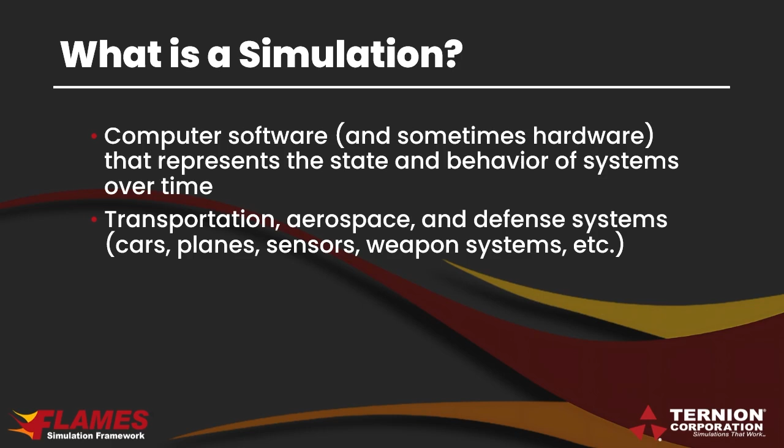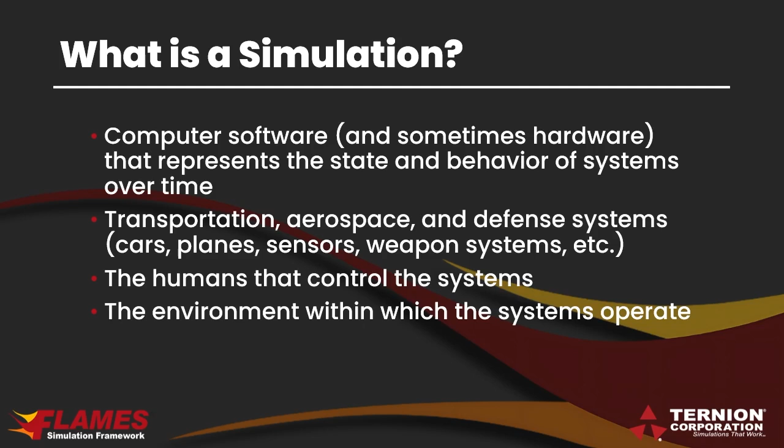The systems that we're talking about are aerospace and defense systems such as cars, planes, sensors, etc. We're also sometimes simulating the humans that control those systems, and we're simulating the environment within which the systems operate, such as the terrain, the bodies of water, or maybe the weather, the roads, things like that.

Oftentimes, simulations are divided into three different categories. The first category is live. It's real humans operating real equipment for purposes other than the reason for which that equipment was created. For example, if you're training how to use a piece of equipment or you're testing that equipment, that would be considered live simulation. Virtual simulation is what people oftentimes think about when they hear the word simulation.

This is when you develop software and hardware to represent real equipment as closely as possible so that real humans can use it like they're using the real equipment. So this might be a flight simulator where you're in a simulated cockpit and you're training on how to fly an airplane. That would be considered a virtual simulation.

The third category is a constructive simulation. In a constructive simulation, it's 100% software. It's a computer program that is simulating equipment as well as humans.

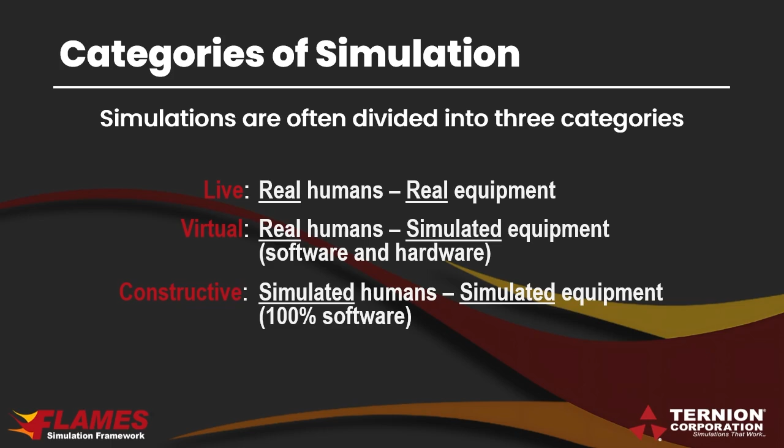In development of simulation and the maintenance of simulation, there are some really big challenges. Two of those are, first of all, that most organizations have unique requirements, and those requirements change often. This means that we will always have to have many different simulations, and we'll have to maintain those simulations. The next challenge is that simulations are oftentimes very large and very complex systems, and what this means is that it's very expensive and time-consuming to develop those simulations and to maintain them.

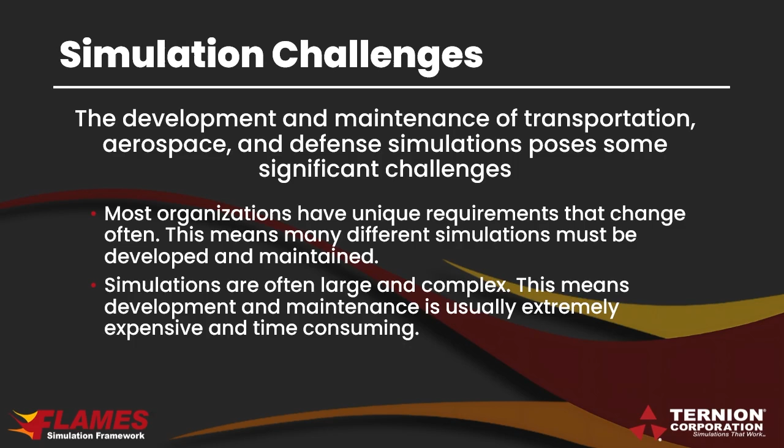And these two challenges together ultimately lead to the fact that a lot of organizations don't have the simulations that they need. One of the reasons that simulations are so expensive and time-consuming to develop is that in the past, simulations have been developed uniquely for each set of requirements.

So an organization has requirements, they put out a request for proposal, an organization is selected to develop that simulation, and they develop a unique simulation to meet those requirements. This has happened over and over and over again, which is why we have hundreds and hundreds of simulations and why it costs so much, because each one of those has to reinvent a lot of the same software.

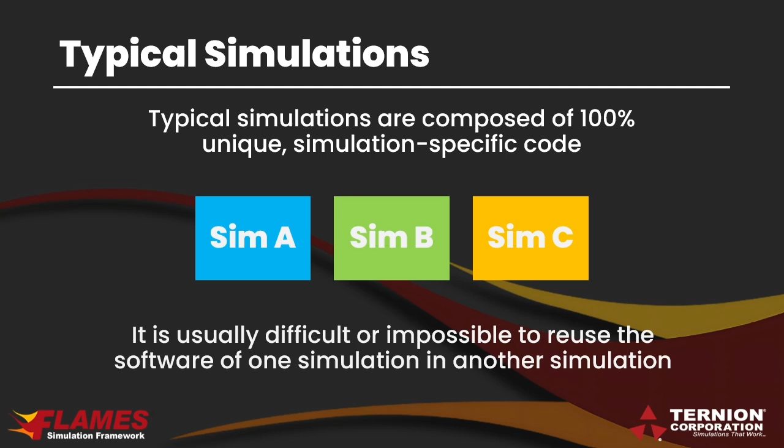One of the things that complicates this is that it's very difficult and sometimes practically impossible to reuse software from one simulation in another simulation. So there's unique development and maintenance activities for every single simulation, and that's because the simulations have unique database formats, unique software architecture, unique user interfaces, and software does not migrate between different simulations easily.

One of the ways to address this, a more modern way of developing software, is to use a simulation framework. If you use the right framework, it will provide the majority of the software that you need, and all you have to do is develop the specific software that you need for your particular simulation. It's very difficult to develop a framework that is flexible enough to support many different simulations, but a really good simulation framework can do that.

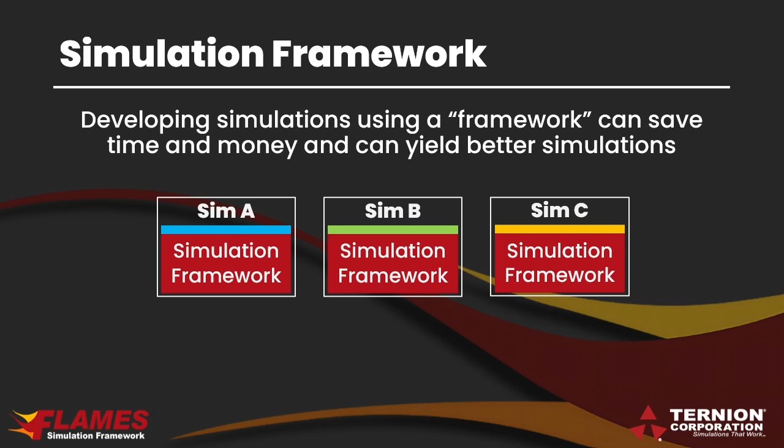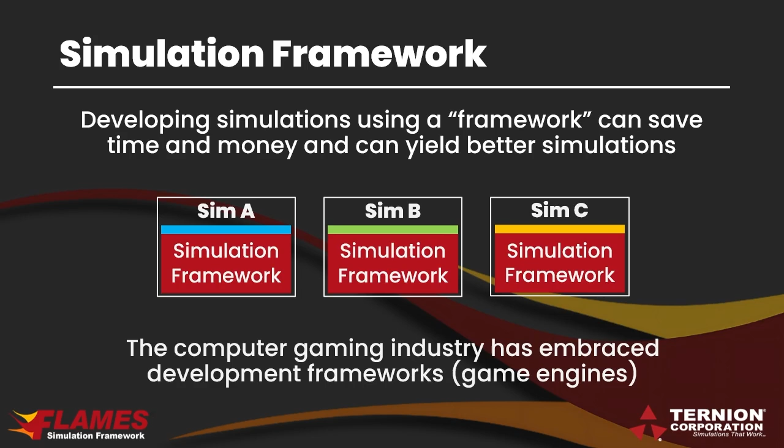The gaming industry has figured this out. Computer games used to each be developed uniquely with 100% unique code, but that's very unusual these days. The gaming industry has embraced the use of frameworks. We call them oftentimes game engines. Computer games are very often now developed on top of a game-independent game engine rather than trying to build the game completely from scratch. We need to learn from this in the simulation development world.

So now I can tell you what Flames is. Flames is a framework that can be used to develop constructive and the software parts of virtual simulations. So as a true framework, it is not a simulation. It is designed to develop simulations. It's not a simulation by itself, just like a game engine is not a game.

Over 100 different simulations have been developed with Flames over 30 years. Some of those simulations have been developed by Ternion. Some of those have been developed by other people who've gotten Flames and built the simulations themselves. That's really what it's designed for. We call these simulations Flames-based simulations, so these are all simulations that have been developed using the Flames framework.

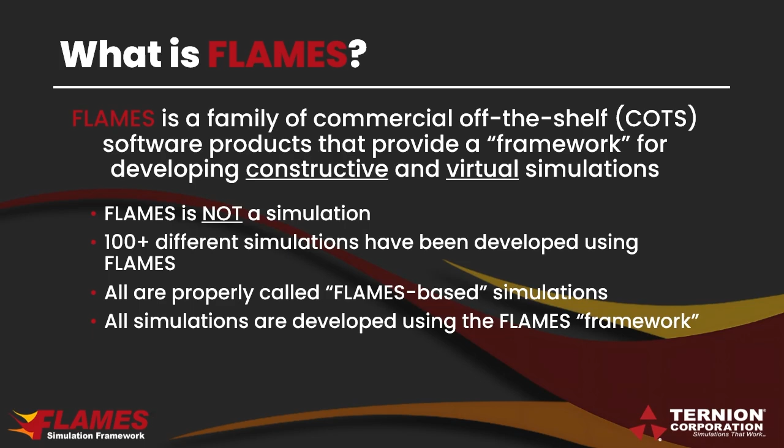So let me tell you a little bit more about what it looks like to develop a simulation based on the Flames framework. The Flames framework is independent of any simulation that you would develop from it. The same framework can serve as the foundation for all different kinds of simulations. The way we do this is we've made a clear distinction between the infrastructure software and the modeling software.

Every simulation has both of those types of software, but it's usually all mixed up together. In Flames, we've taken all the infrastructure software and put it inside the Flames framework. The infrastructure software is software that doesn't model the systems that exist in the real world. It's the database management, the user interface, memory management—things that exist because we're talking about a simulation and not a real system.

Modeling software is the software that is used to simulate the particular systems that are being simulated. We figured out how to isolate those two and how to build a framework that is independent of whatever model it is that you want to develop.

One of the magical things we had to do is come up with interfaces that allow models that have been developed to plug into the framework automatically, without having to do any integration effort or change the framework itself. That allows us to implement the models as plugins. So you write plugins that implement the airplanes, the missiles, the sensors, the automobiles—whatever it is that you want to simulate.

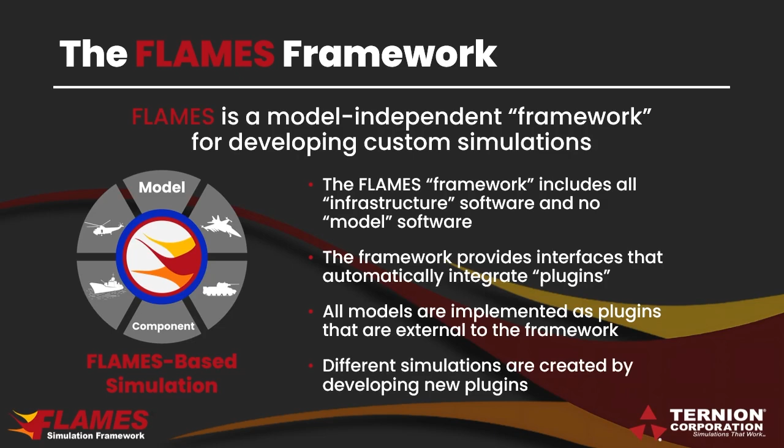They are implemented as plugins, and you get your simulation simply by plugging in whatever models you've created in your plugins. So you've seen a variation of this chart before. This is now showing how you develop a Flames-based simulation. As this chart explains, you build plugins to represent the systems, you build them on top of Flames, and you get the simulation that you want.

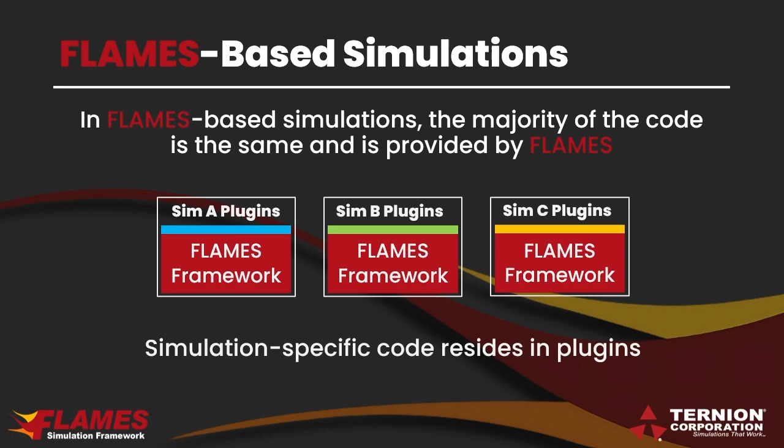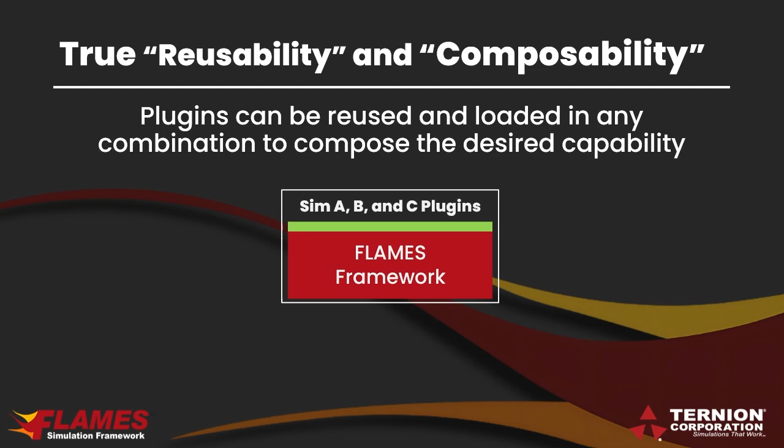Because all of these plugins are developed using the same architecture, and because they all use the same interfaces provided by Flames to plug in, you can reuse those plugins in any combination to create new simulations. So you can mix and match the plugins and load them in any combination you want to compose the desired functionality. That's another way you can save money using Flames, because you can reuse plugins developed for one simulation in another simulation.

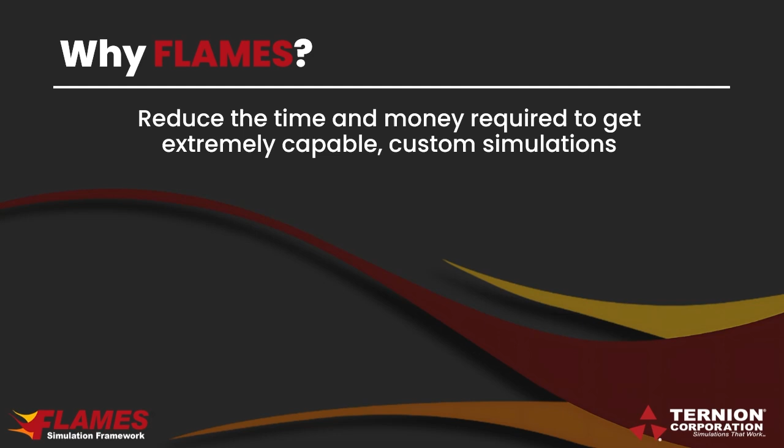So in summary, why would you want to use Flames? Well, the single statement is it's to reduce the time and money you need to get an extremely capable custom simulation. You do that because, as we've already explained, most of the software that resides in a simulation is provided by Flames. You don't have to develop it.

You don't have to maintain it. You don't have to test it. You don't have to keep it up to date with the latest operating systems and tools that are out there. We do all that for you at Ternion. You start off with most of your simulation already developed when you're building a Flames-based simulation.

We also help you in the development of your system-specific software and those plugins. We have a very well-defined architecture and class hierarchy that greatly simplifies the design and development of your simulation-specific software. And as we've already talked about, you save money long-term by being able to take plugins you develop for one simulation and reuse them in another.

Just as important, you end up with a simulation that is very capable and has features not found in most simulations, and it's very reliable and very easy to use. That's because this framework has been used as the foundation for many different simulations, and we've been working on it for over 30 years.

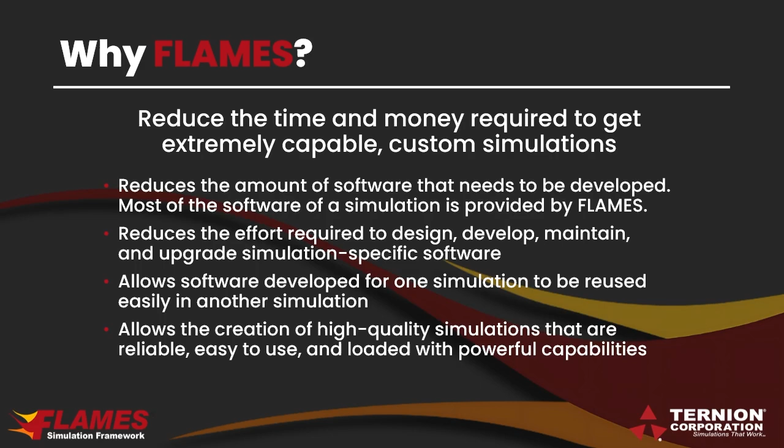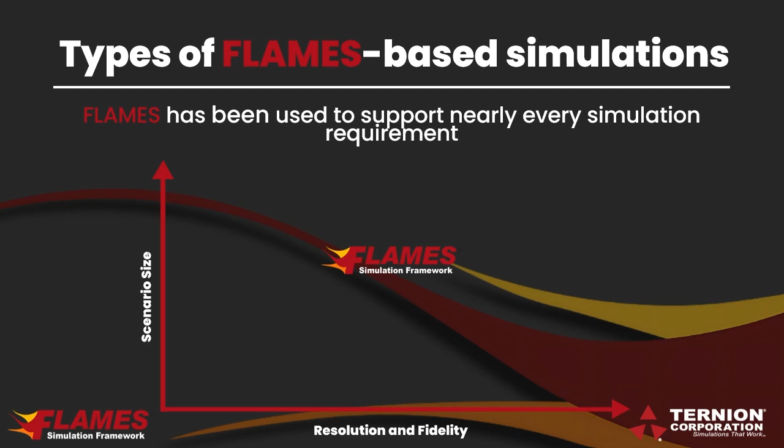So in summary, these are the types of simulations you can build using Flames—pretty much any type of virtual or constructive simulation you can think of. Simulations that do small scenarios or large scenarios with even hundreds of thousands of players. High fidelity models or low fidelity models. In practically every modeling and simulation domain that exists, Flames has supported the development of simulations that serve all of these domains.

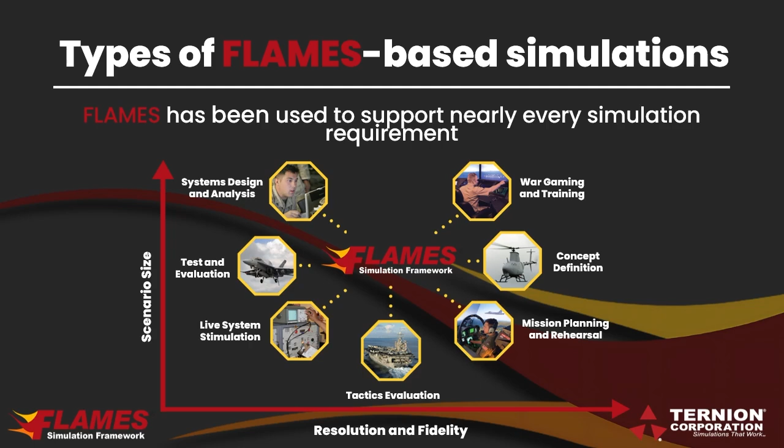So this concludes my overview of Flames. I hope it's been helpful, and I hope you have a little bit better idea now of what Flames is.

If you're interested in learning more about Flames, here are some suggestions on videos you could watch next. One is the next video in the overview series, the overview of Flames products. This video provides an overview of the Flames engine products, the Flames developer products, and the Flames optional products.

After that, you might consider watching the video on the Flames ecosystem. This is a series of interconnected applications used to purchase, install, and run Flames applications, and it also helps support the development of Flames-based simulations. So it's not officially part of the Flames product line, but it's tools that make Flames really easy to set up on your computer and use.

The best thing to do would be to download the Flames developer, which includes the free trial version of the Flames engine, and then the Flames content most interesting to you, and give it a try. Along with that, go to the Flames free training videos on our website. There are dozens of training videos explaining how to run Flames applications and how to develop Flames-based simulations. That would be the best thing to do if you really want to learn about Flames.